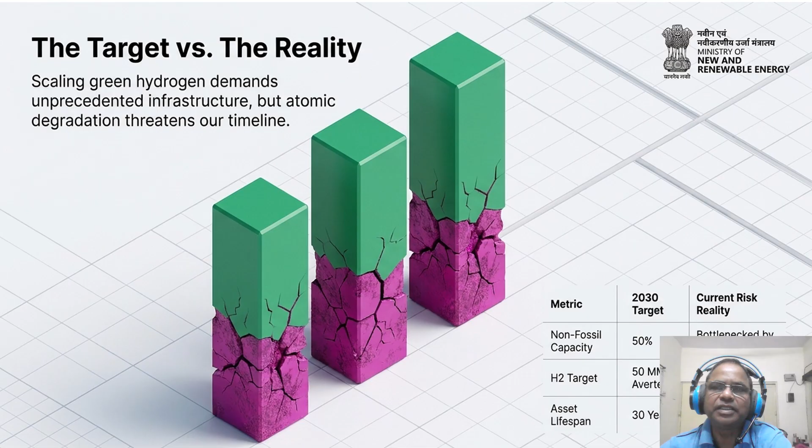Building that bridge requires us to fuse two very different disciplines, macroeconomics and micrometallurgy. And this is all about the things that we have discussed right now, fusing macroeconomics with micrometallurgy. Observe the interconnected node map on the screen. We are merging sensor data and forensics with supply chain economics. In the central places, we can see that the economics in amber and the metallurgy in blue are linked by an emerald green arc of data flow.

Look at the table at the bottom. We are pulling component cost data at the system level and safety research from over 30,000 examples. But the most critical data comes from forensic microscopy at the atomic level. As engineers, we often focus on macro system performance, but hydrogen forces us to look at the nano grain boundaries. So the operational impact is clear. You cannot price a project based on steel cost alone. You must price it based on the grain level stability of that steel under hydrogen saturation.

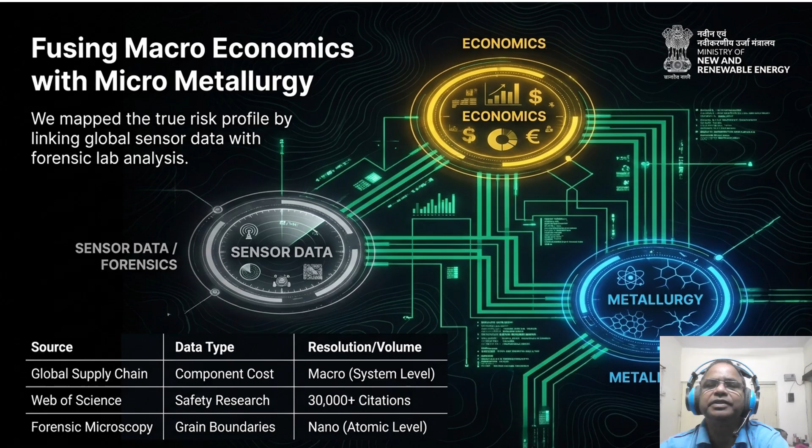This is not just academic interest. It's a desperate alarm being sounded on a legacy system. For plant superintendents, executives or managers, the point is that the old ways of handling gas are no longer the industry standard. The kinetics of hydrogen are different from natural gas. It's more mobile and more corrosive. This data surge proves that we are entering a new era of hydrogen-first engineering protocols. If your current safety manual hasn't been updated since 2010, you are operating on obsolete intelligence. We are moving from a linear understanding of risk to an exponential one, a huge risk we are going to incur.

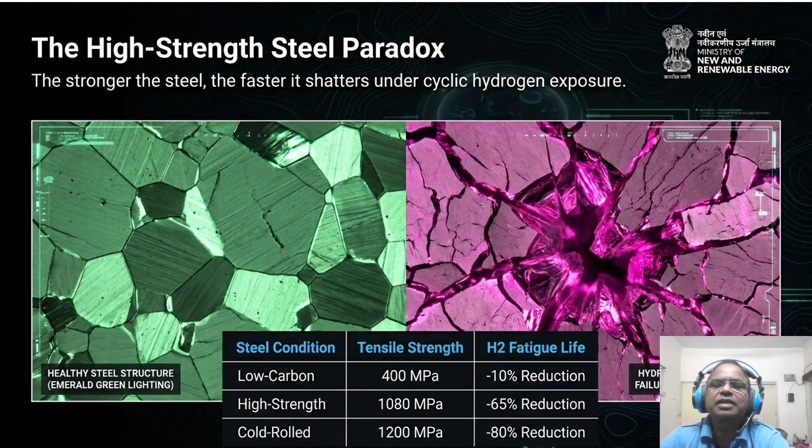in high pressure dispensers. However, there is a metallurgical silver bullet when we look at the cryogenic threshold of specific alloys, and our slide is on this specialist topic of the cryogenic nickel threshold. So we have found a precise metallurgical tweak that changes the game. So look at the two bars.

The green bar on the left represents optimized alloy, while the red crumbling bar represents a standard 304 steel at minus 150 degrees centigrade. So the secret is nickel content as shown in the table. A standard 304 with less than 10% nickel suffers severe decohesion. The atoms literally let go of each other. But by optimizing to a nickel content of over 12.5%, we achieve near zero degradation.

So what result does it give? Here it is about procurement and capex. You might save 5% on initial purchase of standard austenitic grade, but you will pay for it 1,000 times over in premature rupture. For cryogenic storage, 12.5% nickel is the absolute floor for safety and asset longevity. This is the difference between a system that lasts 30 years and one that fails in 5.

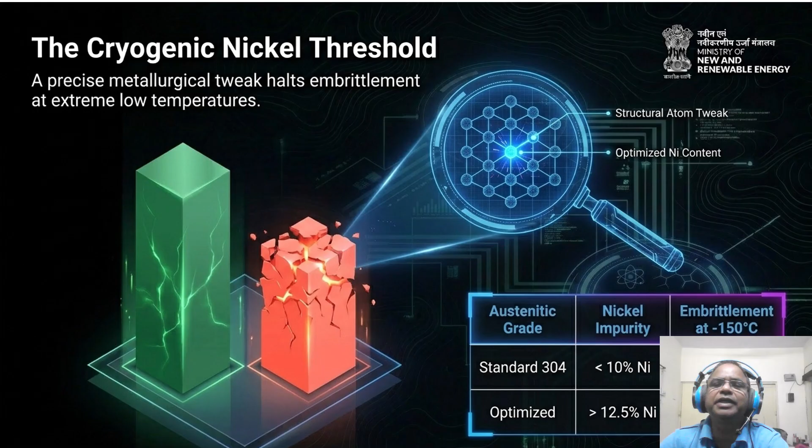To understand why this nickel threshold matters, we must apply the PSPP framework to the degradation sequence. And our next slide is on this process structure property analysis, which is important to know about hydrogen degradation, which is a sequential atomic disease. So follow the 3D block schematic on the screen. It starts at the surface and moves inward. This is the PSPP framework: process, structure, property, and performance.

So as shown in the table, the process is your daily pressure cycling. This forces H+ absorption into the structure, specifically at the grain boundaries, leading to void formation. And what are the consequences? The property of fracture toughness dropped by 40%, ultimately leading to performance failure in a big way, a premature rupture. So the operational impact is that by the time you see a crack, the disease has already won. We must monitor the process of pressure cycling to predict the performance of the asset.

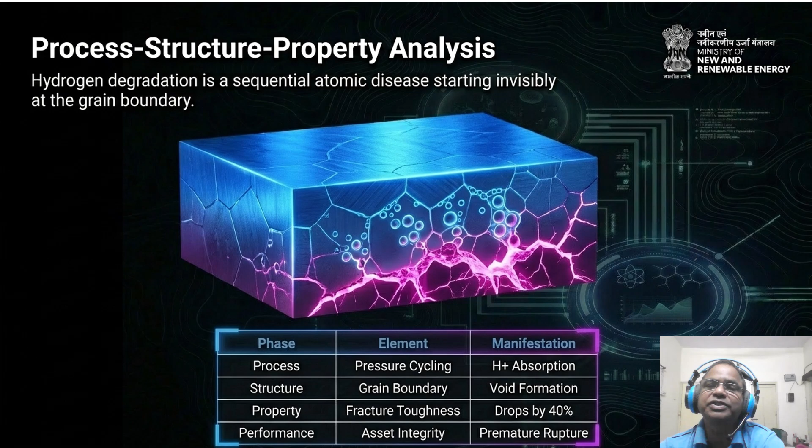This slide is the roadmap for the forensic analysis. We do not look for the break, we look for the condition. We are looking for the rules that lead to the void formation. So knowing how the material fails allows us to map these vulnerabilities against the actual cost of a hydrogen station. And the cost vulnerability matrix is so important that we have to share it in this slide. So this is your capital allocation map, and we have broken down a standard hydrogen station into four components.

Notice the large red diamond, the compressor. It represents 49% of your station cost and is at a critical vulnerability level because of its high frequency moving parts and pressure fatigue. Next is storage at 15%, then chiller at 14%, and the dispenser at 13%. So what are the consequences? Is it clear for the project managers? You must over engineer the compressor. It is the heart of the system and the most likely point of failure. If the compressor goes down due to hydrogen induced fatigue, half of your investment is offline.

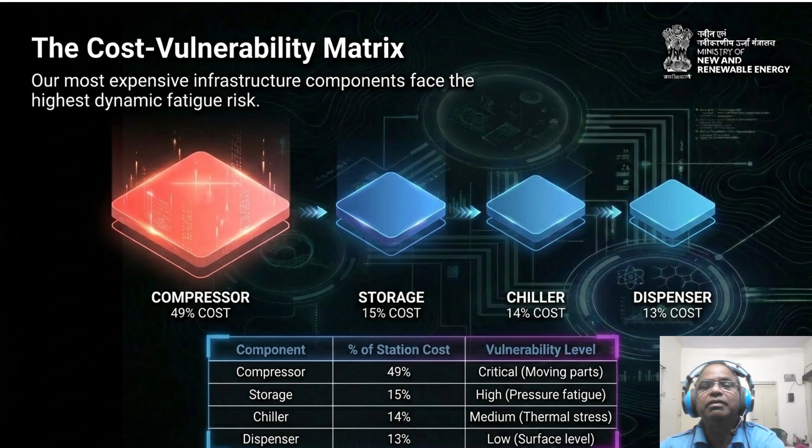While dispensers have lower vulnerability because the exposure is surface level, the compressor faces a dynamic multi-axial stress that also accelerates the embrittlement. So focus your maintenance budget where the cost and vulnerability intersect. If we ignore this intersection, the results are not just financial, they are catastrophic, as we saw in a case study, which we are going to show in the next slide without naming the place or organization.

The root cause was a lack of a specific hydrogen material protocol, and the operational impact is a 50 million US dollar loss and a total loss of public trust. So this was not a random accident, it was a predictable failure of material science. Hydrogen will find every weakness in your membranes and every flaw in your protocol. The reason hydrogen is so unforgiving is revealed when we compare its flammability limit to traditional fuel.

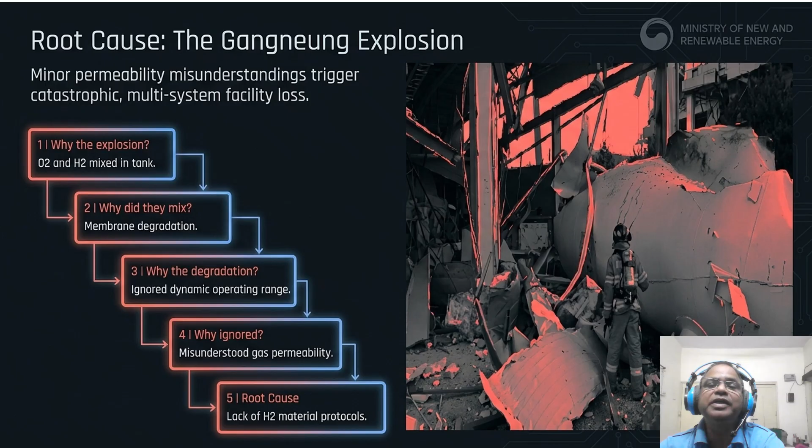So, what are the consequences? Traditional venting strategies for methane will fail with hydrogen because it requires so little energy to ignite and has such a wide explosive range. A teeny static spark that would not touch the gasoline will turn a hydrogen leak into a blowtorch. Safety is not about preventing the big leak, it's about managing the microenvironment.

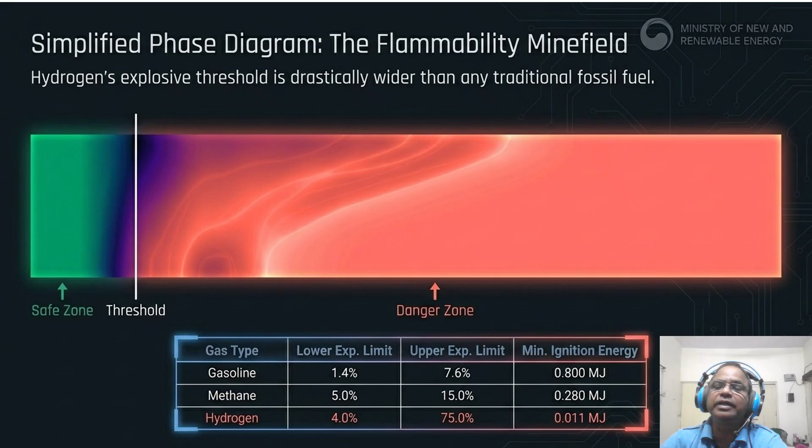So frequent start-stop cycles are what drive the hydrogen into the grain boundaries. If you want to extend asset life, you must optimize your fuel protocols, or we can say feeding protocols, to minimize this rapid pressure swing. Stability is the key to longevity. Based on these correlations, we can now forecast the reliability of different materials over a 20-year horizon.